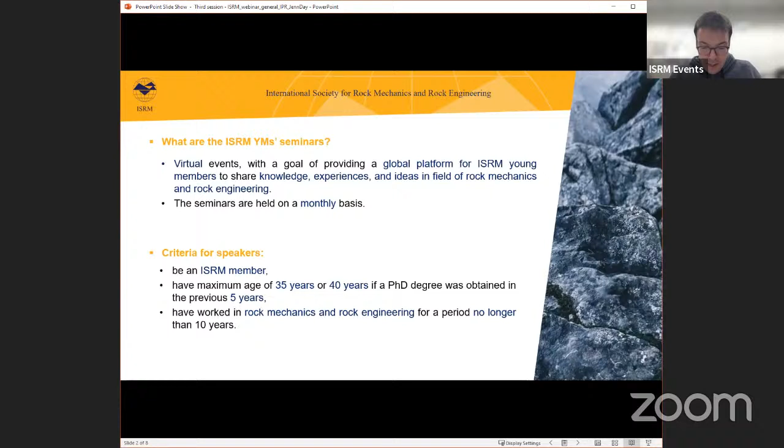The nominations of the speakers can be made by the nominee's national group or by some other person or organization acquainted with the nominee's work, and we also accept self-nominations.

The nominations are to be addressed to the ISRM Young Members Seminar Series Organizing Committee, and on the screen you can see our contact email. This webinar is now being held every month, and we invite you all to keep in touch.

So we will now begin the first seminar of the day, and I'll give some comments on the organization of the seminar. Each presentation will last 20 minutes and will be followed by 10 minutes of questions and answers.

For the smooth running of the seminar, I'll ask you to keep your cameras turned off and microphones muted during the presentation of the speakers. And if you have any questions, please use the chat or the raise hand feature.

Okay, so let's move on with the first speaker. The first speaker is Dr. Jon Justo Urrutia, who, I'll give some lines on the CV, holds a PhD in civil engineering from the University of Cantabria in Spain, and his research field is focused on rock fracture mechanics, in particular on the application of local criteria for the fracture assessment of rocks under different loading and temperature conditions.

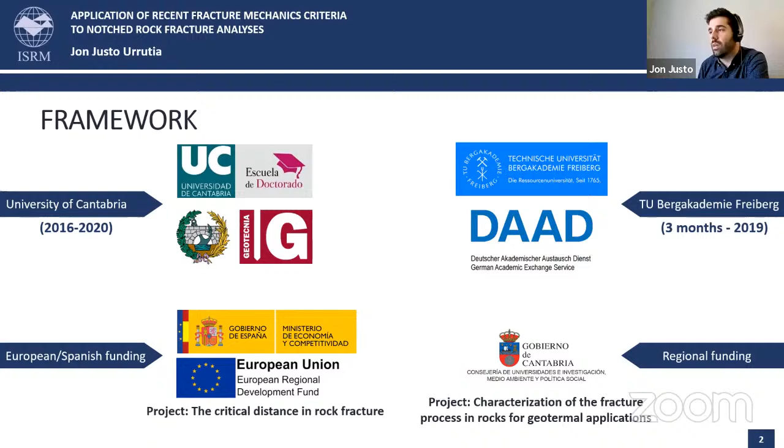To explain the framework of this research, this is part of my PhD thesis entitled Fracture Assessment of Notched Rocks under different loading and temperature conditions and using local criteria, which I performed at the University of Cantabria in collaboration with the Technical University Academy of Freiberg in Germany. Jorge Castro and César Sagaseta were the directors of this research, which was funded by the Ministry of Economy and Competitiveness of the Spanish government, by the European Regional Development Funds, and also by the Regional Fund of the Government of Cantabria.

This is the general outline I'm going to follow during my presentation. First, I will start with a brief introduction explaining some basic concepts of fracture mechanics. Then I will explain the theoretical background of the two studied local fracture criteria: the theory of critical distances and the strain energy density criterion. The former is a local fracture criterion based on the stress field around a certain defect, and the second is an energy-based approach. The application of these two methods requires the characterization of some basic mechanical properties of the studied materials, in this case the rocks. So in the next point, I will describe the analyzed materials and the performed laboratory campaign. Finally, I will finish with the main results and their discussion and some final conclusions.

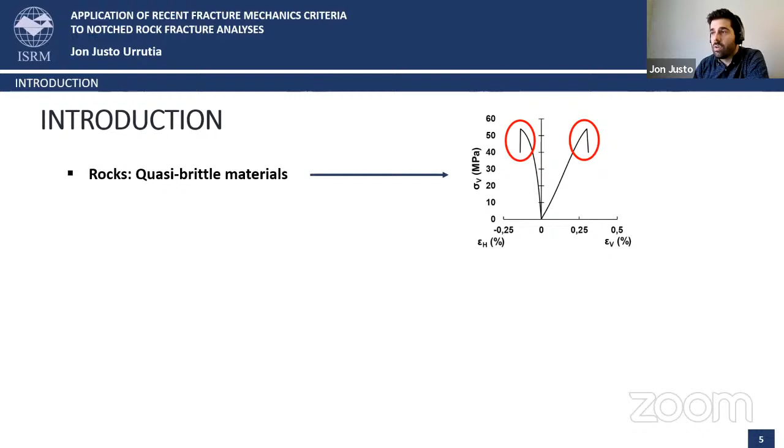Let's move directly into the introduction. One of the main aspects characterizing a rock from a mechanical point of view is its predominantly brittle behavior. Quasi-brittle materials like rocks display very limited non-linear behavior before failure, and therefore crack propagation is unstable and leads to sudden fast fracture. This condition can result in catastrophic failures of rock masses or rock structures, especially under the presence of defects which act as stress concentrators.

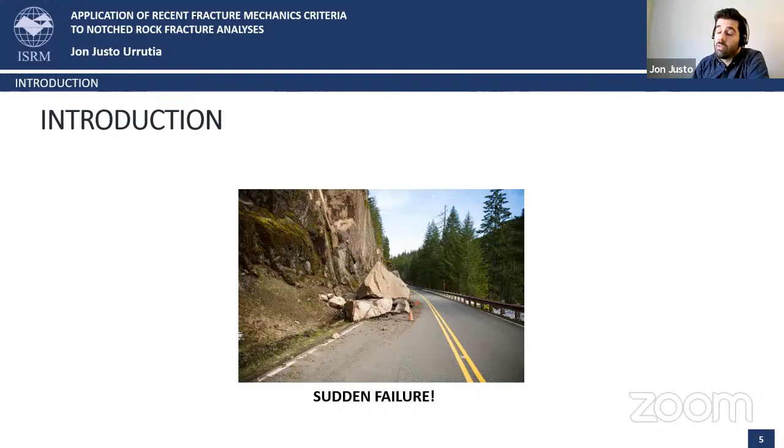For this reason, predicting failure is a major issue of interest in many rock engineering applications, such as civil engineering, mining, or energy engineering. Consequently, there is a general demand for the development and validation of new tools and methodologies that allow the analysis and prediction of rock fracture in a precise and, if possible, simple way.

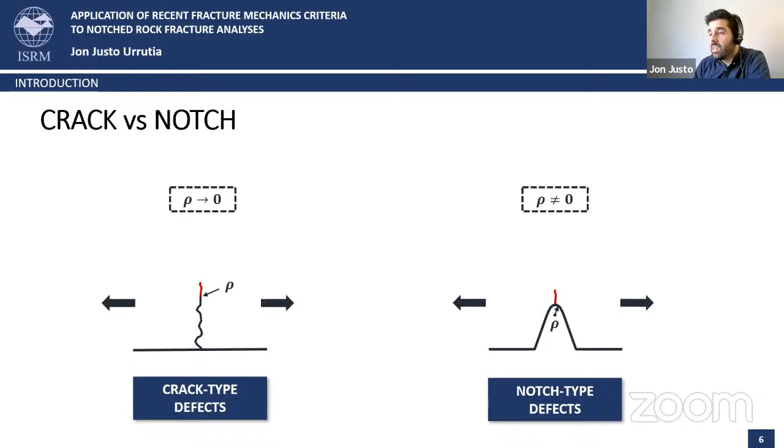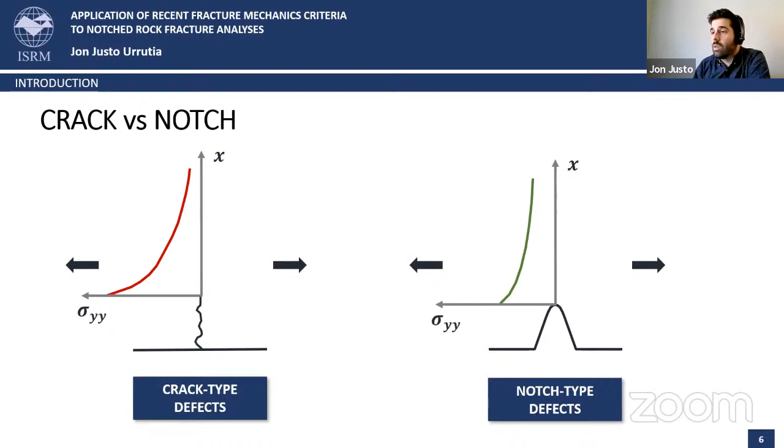While talking about defects, it's important to distinguish between crack-type defects, those with a theoretical null radius as represented on the left of the slide, and notch-type defects, those with a finite radius as represented on the right. Both generate stress concentrations around the defects when subjected to external loading, leading to the initiation and propagation of cracks. If we represent the stress field in the bisector plane of the defects, we can observe that notch-type defects generate less demanding stress fields than crack-type defects.

This is a simplification, but this is what is called the notch effect. So proceeding on the assumption that all defects behave as crack-type defects, as proposed by traditional fracture mechanics, might be very conservative in many practical situations.

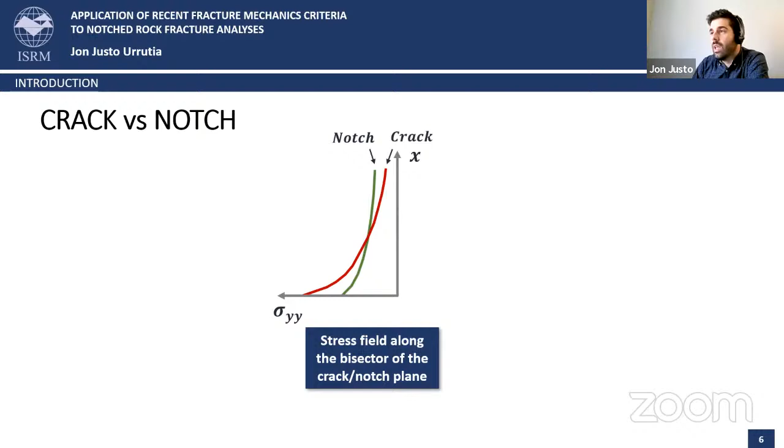Another concept I would like you to keep in mind is the failure modes. Three different failure modes are generally distinguished in fracture mechanics. The first, mode 1, stands for the opening or tensile situation. Mode 2 corresponds to in-plane shear, and mode 3 corresponds to out-of-plane shear. It is widely accepted that crack propagation phenomena in rocks are mainly dominated by tensile or opening loading modes, that is mode 1.

In this presentation, I'm going to focus on mode 1 loading conditions because of time limitations, but in our research we also analyzed mixed mode 1+2 conditions.

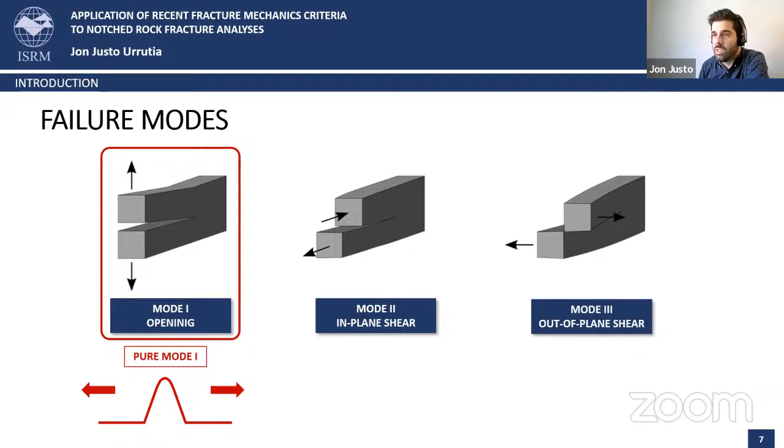The next point is the description of the study methodologies. I think it's not worth going deep into the analytical background of these methods. If you're interested, you can contact me or look at the published articles. But it's more important to explain the basic concepts behind these two methods, so I'll focus on the basics and not include too many formulas.

Let's start with the theory of critical distances. As I said before, it's a stress-based local fracture criterion. Despite its potential and application in many materials, scarce work can be found on the application of this method in the particular field of rock mechanics. The theory of critical distances is a group of methods with common features, such as the use of a material characteristic parameter with length units, called the critical distance, and the use of linear elastic analysis for fracture assessment.

The theory of critical distances can be applied by the point method, the line method, the area method, or the volume method, depending on how the stresses are evaluated.

The first one, the point method, is the simplest form of the theory of critical distances, as it states that fracture occurs when the stress at a certain distance from the notch tip, equal to the critical distance divided by 2, reaches the inherent strength of the material. On the right of the slide, you have the analytical expression for the critical distance, which only depends on the fracture toughness and the inherent strength of the material.

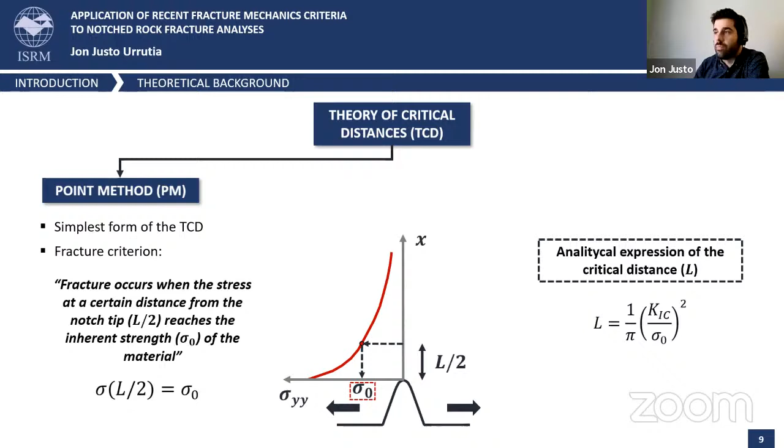In the case of rocks or quasi-brittle materials, the inherent strength can be assumed to be roughly equal to the tensile strength of the material. So to define this parameter, we only need the fracture toughness and the tensile strength of the rock. The second one, the line method,

states that fracture occurs when the average stress over a certain distance from the notch tip, which in this case is 2 times the critical distance, reaches the inherent strength again. So instead of analyzing the stress at a certain distance, we need to analyze the average stress over a certain distance. The expression for the critical distance is the same.

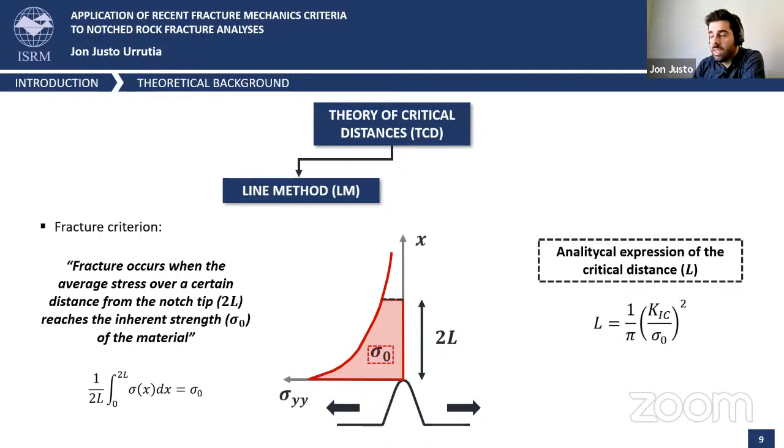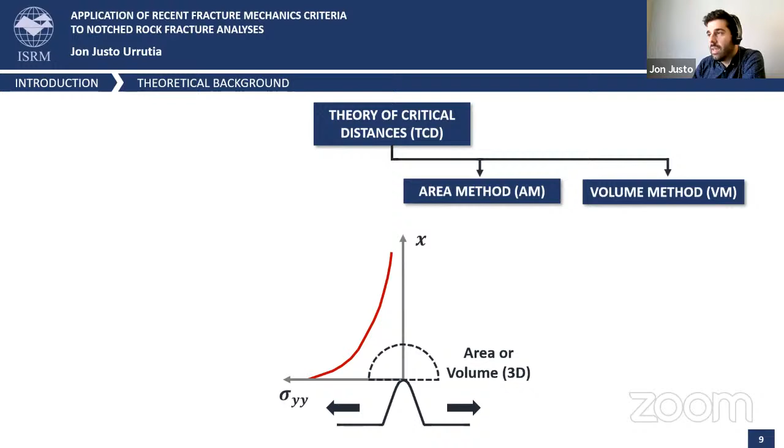Finally, we have the area method and the volume method. Their application is not that easy or straightforward, but basically what they do is analyze the stresses over a certain area in the first case, or over a certain volume in the case of the volume method.

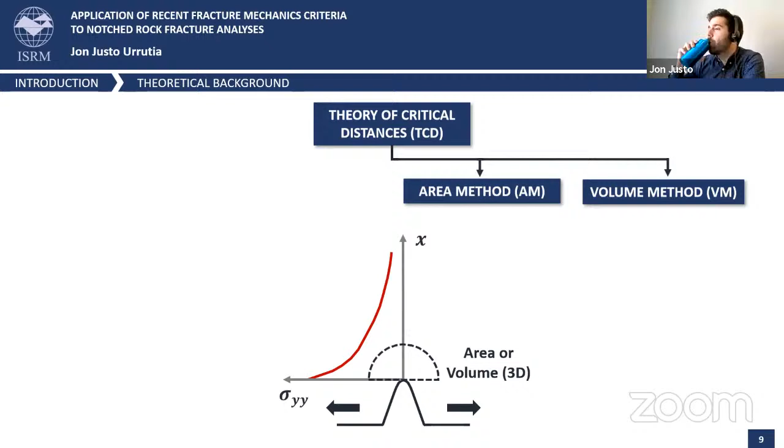Moving now to the strain energy density criterion, this is an energy-based local fracture criterion. This criterion states that fracture occurs when the strain energy density averaged over a certain control volume reaches a critical value. The strain energy density can be defined as the area under the tensile stress-strain curve.

Assuming a perfectly linear behavior of rock, the critical value of the strain energy density can be defined as the area under the triangle defined by the tensile strength and the Young's modulus. In general, rocks are assumed to present roughly linear behavior, but in any case, it should be expected to obtain a lower value of the critical strain energy density than that calculated from the real tensile stress-strain curve.

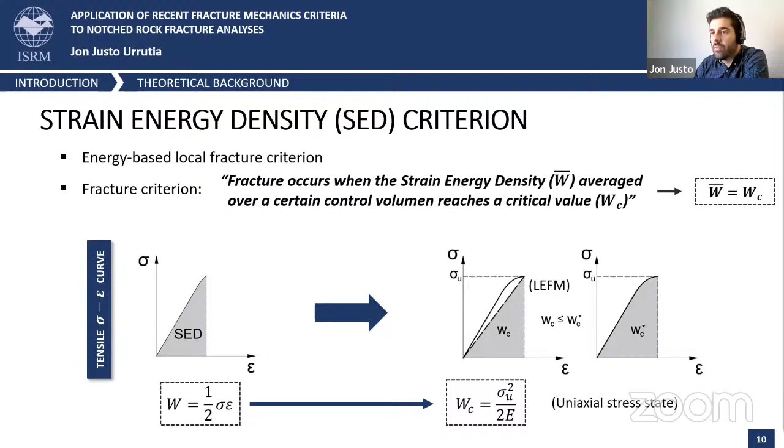In this case, apart from the tensile strength, we also need the deformational parameters of the rock, so we have to define both the Young's modulus and the Poisson ratio. This strain energy density is averaged over a control volume that, in the case of plane strain conditions, becomes a control area, represented on the right of the slide. What we have to do is average the strain energy density in this area, and when this value reaches a critical value, fracture will occur according to this criterion.

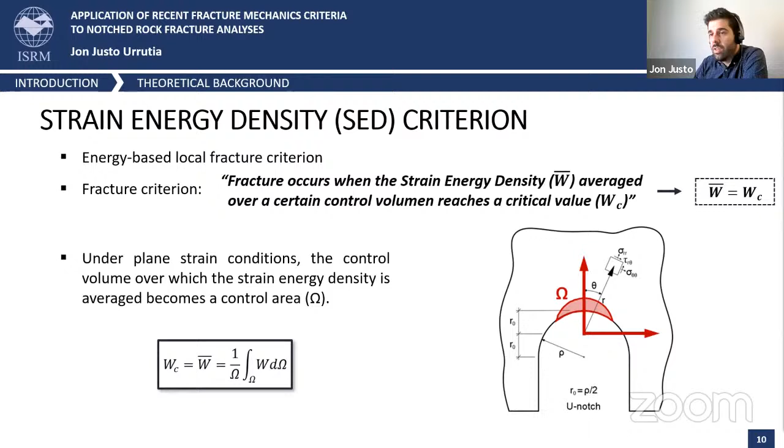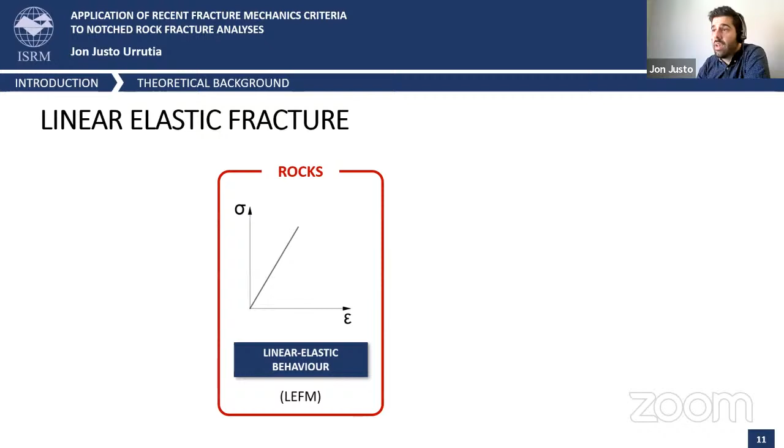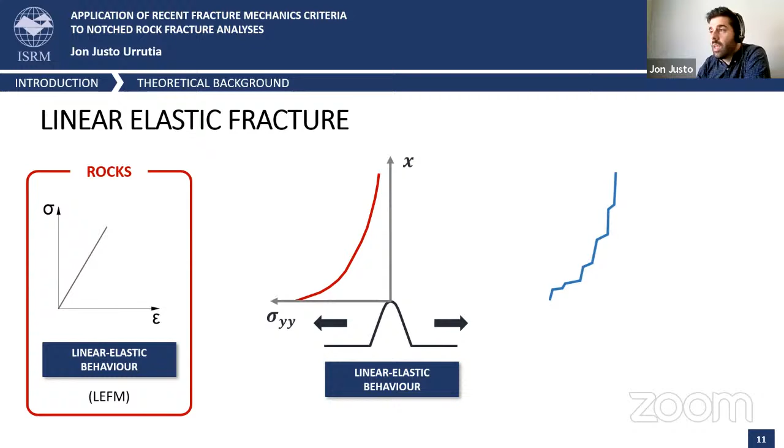In any case, neither the theory of critical distances nor the strain energy density criterion consider the maximum stress just at the notch tip, but they evaluate what is happening in front of the defect tip, not only at the tip. So these conditions somehow absorb the difference between the smooth and the stepped curves.

The application of these two methods, the theory of critical distances and the strain energy density, requires the definition of some mechanical parameters of the analyzed materials. The theory of critical distances requires the definition of the fracture toughness and the tensile strength. And in the case of the strain energy density criterion, we also need the Young modulus and the Poisson ratio. So in this section, I will describe the analyzed rocks and the performed laboratory campaign.

Moving into the analyzed materials, we have studied 4 different types of rocks, namely a Floresta sandstone from Lleida in Spain, a Moleanos limestone from Portugal, the Macael marble from Almeria, also in Spain, and the Carrara marble from Italy.

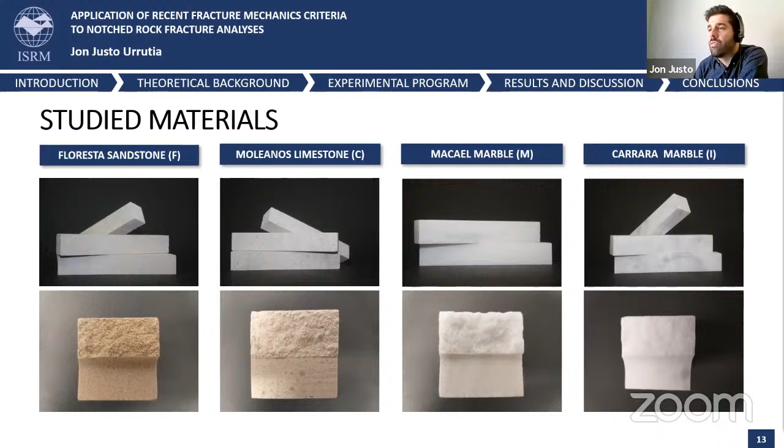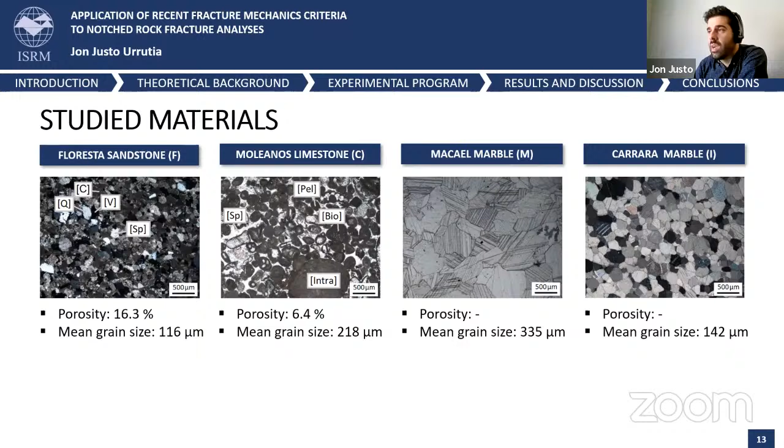Among their properties, I would like to highlight the porosity, which is around 16% in the case of the Floresta sandstone and 6% in the case of the Moleanos limestone. Of course, there is no porosity in the case of the marbles. From a microstructural point of view, the main difference between these two marbles is the grain size, the crystal size, which is relatively larger in the case of the Macael marble.

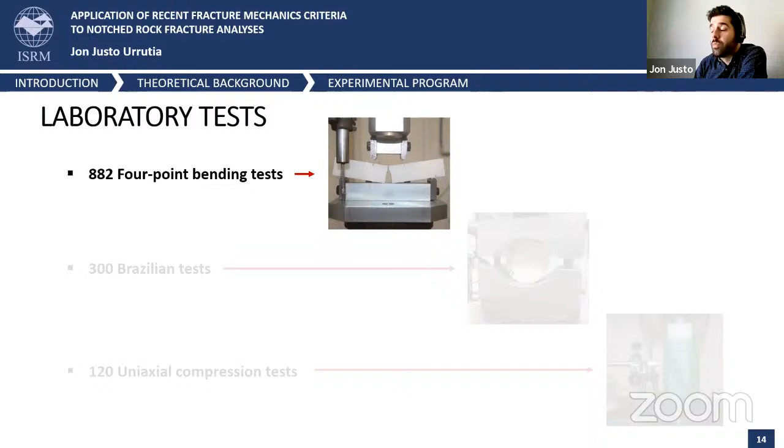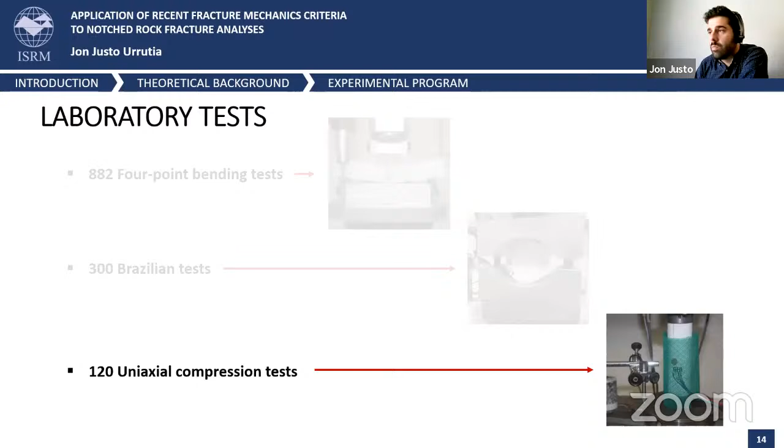For the characterization of these required parameters, almost 900 4-point bending tests have been performed, which provide pure mode 1 loading conditions. 300 Brazilian tests have been performed, and finally 120 uniaxial compression tests with strain measurements have been performed.

So first, the 4-point bending tests have been performed at different temperatures from 23 to 250 Celsius degrees, with a repetitiveness of 6 or 12 tests in some cases for verification purposes.

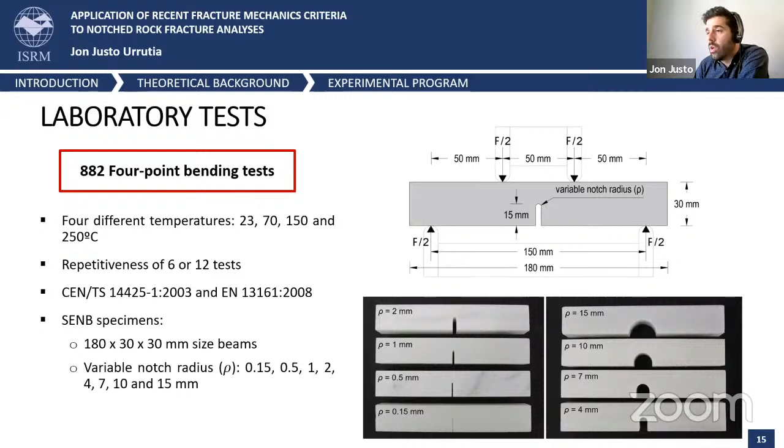There you have some pictures of the used samples, which consist of 180 by 30 by 30 millimeter size single edge notch beam specimens with variable notch radius from 0.15 up to 15 millimeters. Those samples with the smallest notch radius, 0.15 millimeters, were used to calculate the value of the fracture toughness, and the rest of the samples were only used for interpretation according to the theory of critical distances and the strain energy density criterion, to compare the experimentally obtained failure loads with those of the fracture predictions.

So yeah, here you have some pictures of the performed tests.

In order to define the tensile strength of the rocks, 300 Brazilian tests have also been performed at different temperatures, again from 23 to 250 Celsius degrees, using Brazilian disc specimens with 64 millimeter diameter and 32 millimeter thickness.

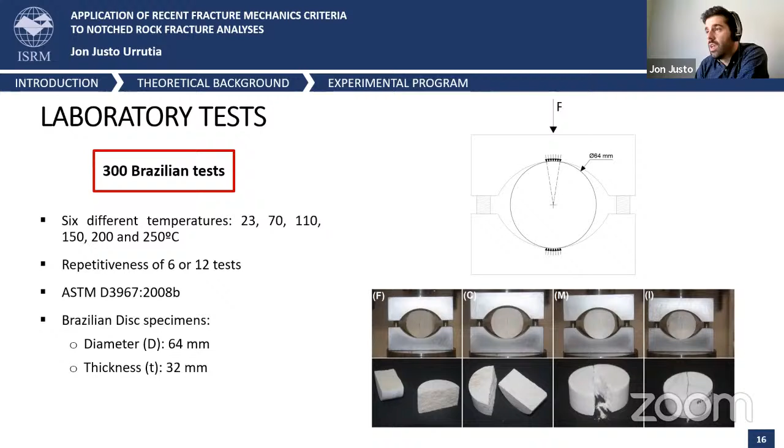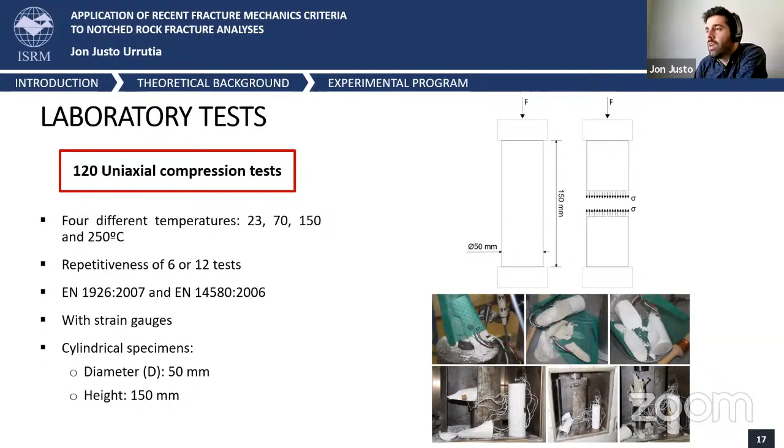And the same for the uniaxial compression test, again performed at different temperatures up to 250 Celsius degrees. In this case, as we needed the deformational parameters, we had to use special strain gauges to measure both the Young modulus and the Poisson ratio at high temperatures, which was not an easy task. Probably the most difficult part of this experimental campaign, because these strain gauges were quite sensitive.

These behaviors are related to two different micromechanisms. In the case of the porous rocks, the Floresta sandstone and the Moleanos limestone, the tensile strength increases for moderate temperatures due to the partial closure of pores or other pre-existing or persisting microcracks. Once a certain critical temperature is reached, thermally induced new microcracks arise, and as a consequence there is a strength reduction. That's why in the case of the non-porous rocks, the marbles, as there is no internal space for the expansion of the crystals, the tensile strength is reduced from the onset of the heating process.

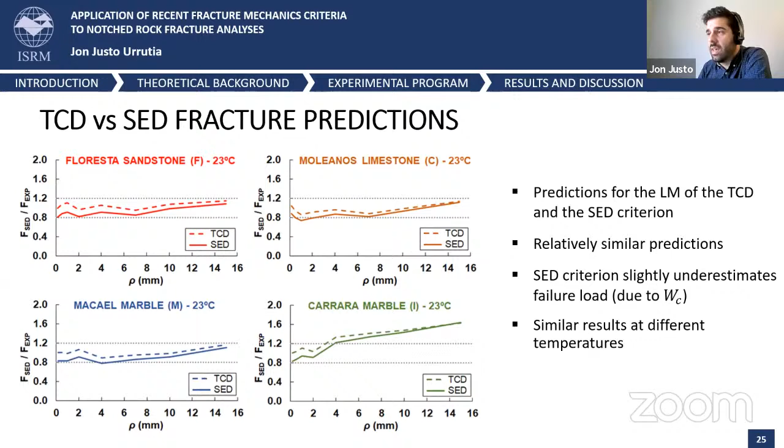If we compare both results, in this case for 23 Celsius degrees, we can see relatively similar results of both methods. The dashed lines correspond to the theory of critical distances, and the solid lines represent the strain energy density criterion fracture predictions. We can observe that the strain energy density criterion tends to slightly underestimate the failure load compared to the theory of critical distances. Another drawback of this method is that it requires the deformational parameters, while the theory of critical distances only requires the fracture toughness and the tensile strength.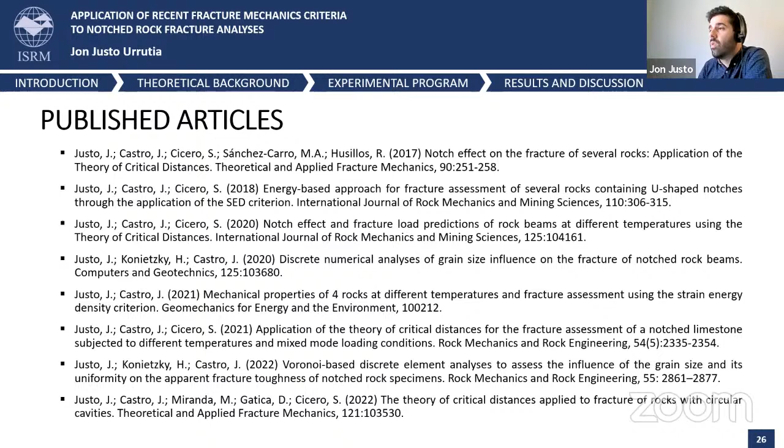To finish, I would like to highlight that the fracture behavior is influenced by thermally induced micromechanisms. We saw that both the tensile strength and the fracture toughness increase up to a certain critical temperature in the case of porous rocks, while they decrease from the onset of the heating process in the case of non-porous rocks. We also saw that the notch effect was evident and significant in the experimental results.

It was observed how the apparent fracture toughness increases with the notch radius from a certain notch size. It's important to highlight also that both the theory of critical distances and the strain energy density criterion offer reasonable and similar fracture load predictions within a range of plus minus 20%. This strip is quite common in fracture mechanics to consider the accuracy of any criterion. So they were valid even at temperatures up to 250 Celsius degrees, as long as linear behavior was observed. They both offer two easy-to-use tools for accurate predictions and evaluations.

In fact, the first one, the theory of critical distances—in this case, once the critical distance is defined, it is straightforward to apply the theory.

It is straightforward to apply this method, and only two parameters are needed: the tensile strength and the fracture toughness. In the case of the strain energy density criterion, additional tests are needed, in particular uniaxial compression tests to define the deformational parameters, both the Young modulus and the Poisson ratio, which are not easy to obtain because you need special strain gauges, special cables that can work at those temperatures, and special adhesives. Also, the welding must be able to work at those conditions.

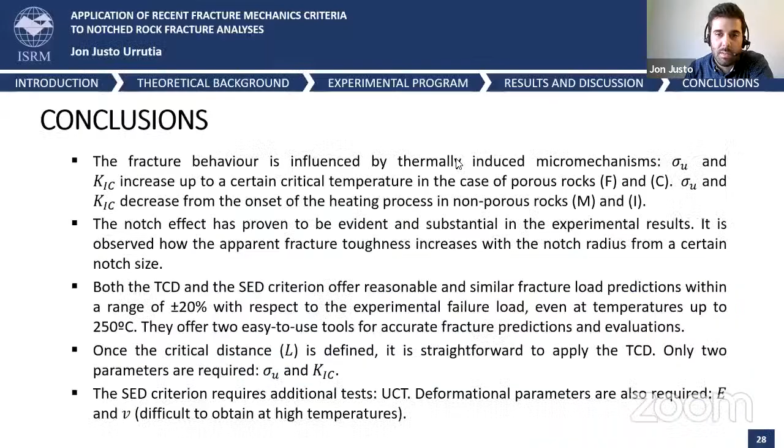But in the case of the marble, no special trend was observed. If we compare these results to those at 250 degrees, the trends were observed to be relatively similar. It's difficult to obtain robust conclusions because of the high scatter we have. The Carrara marble has always given us relatively bad results in all the tests because of its nonlinear behavior, so we couldn't obtain any deep conclusion on this issue. In any case, it's an interesting question, and I will have a look at it because, especially in the marbles which have no internal space for the expansion of the crystals, there must be an effect.

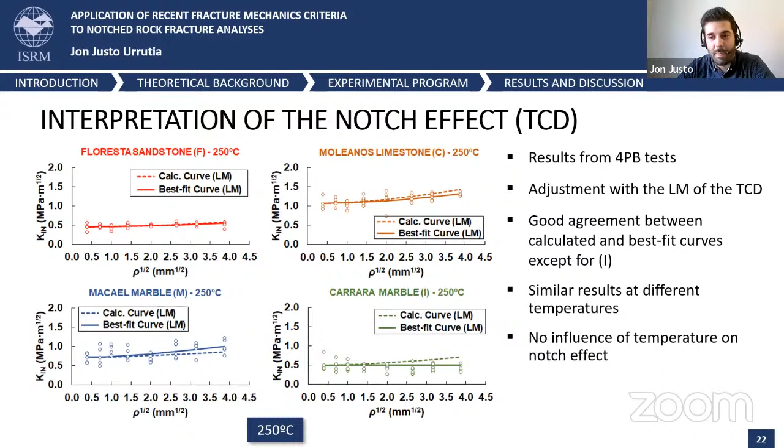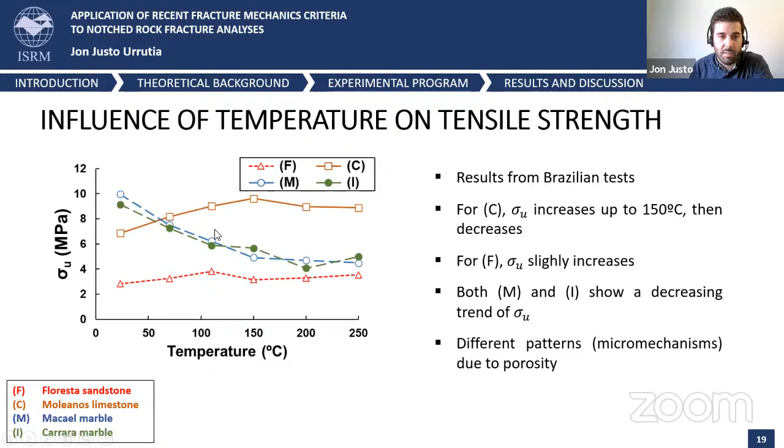The absolute value, here we have the fracture toughness. This is the tensile strength. The fracture toughness in the case of the marbles, the blue line and the green line: from 23 to 70 Celsius degrees it was almost constant, but then we can see a clear reduction of the values.

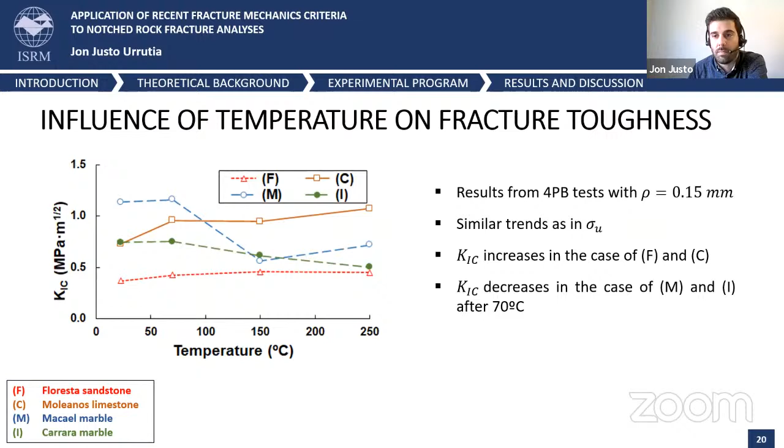Okay, so I just have a little curiosity. Have you tried to compare the results with the tensile strength results obtained in the study? Fracture toughness results compared with tensile strength results?

Yes, well, I don't have the results here because I'm not working on my computer, but yes, we are writing. I think it's now under revision, a technical note on the comparison of the tensile strength and the fracture toughness.

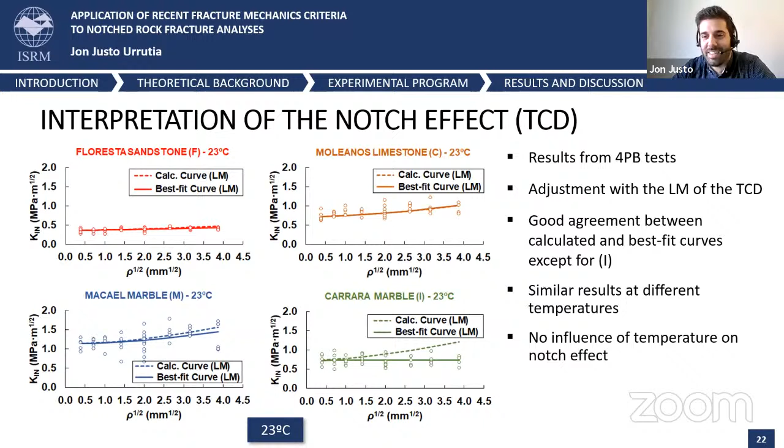Yes, maybe Jorge Castro can tell you something about this, he's connected. Well, just to comment that we saw in the literature that there were some empirical correlations between the fracture toughness and the tensile strength, and there is a ratio that varies between two values.

And we understand that somehow that ratio for us is related to the critical distance or to the area that we average for the strain energy density method for the area that we average the energy. And that is in turn related with the grain size. So the ratio between the direct tensile strength and the fracture toughness is more or less constant, but it somehow depends on the grain size. For rocks with higher grain size, the ratio has some values, and for lower grain sizes, the ratio varies a little bit. There are also, I think in the literature, some numerical simulations that propose some correlations in that sense.

Okay, many thanks. I'll look forward to reading your paper because I think it's a very interesting and recent topic to be studied. So, well, thanks for your answers. And now I switch the role to Jennifer Day, who will continue with the seminar. Thank you.

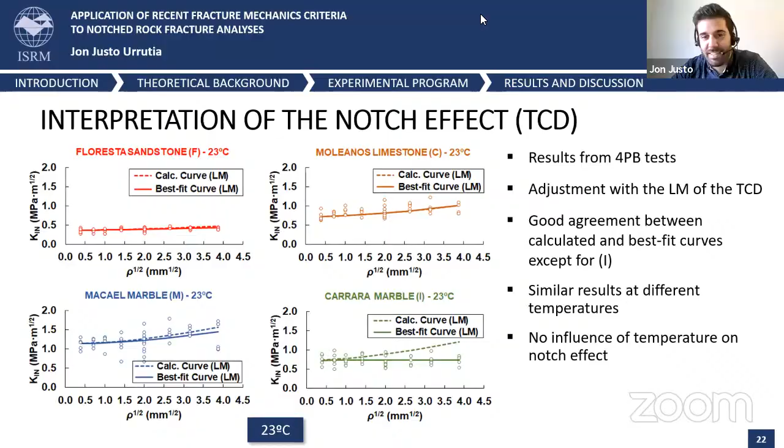Jonathan Aubertin, who holds a mining engineering degree from McGill University in Montreal, Canada. From 2012 to 2021, he held various roles within mining company Windsor Salt and the US parent company Morton Salt, working as a mine engineer, production engineer, and general supervisor. Jonathan completed a PhD in geological engineering in 2020 while working at the Weeks Island mine in southern Louisiana in the United States. In 2021, Jonathan transitioned to an academic role as an assistant professor at École de Technologie Supérieure in Montreal, Canada. His research work focuses on rock blastability, rock mass characterization, and time dependency in rock engineering.

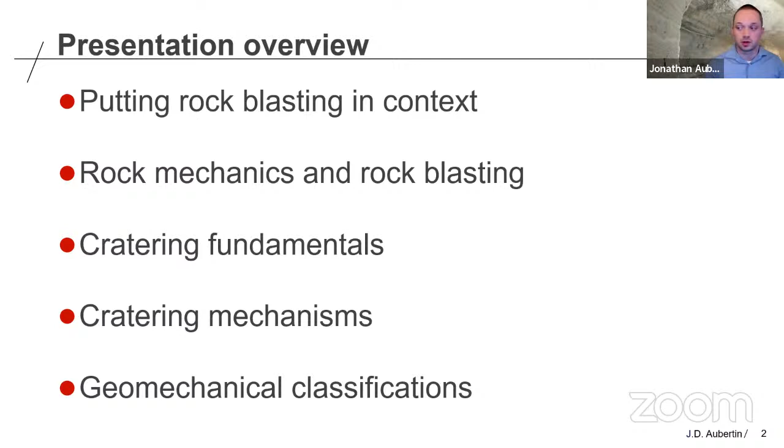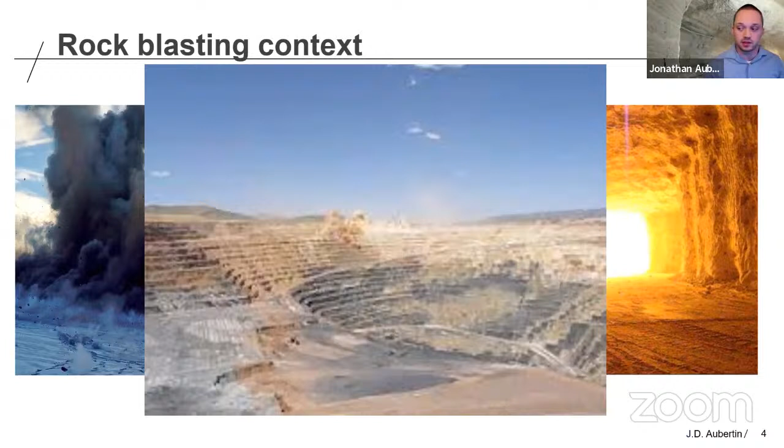I think we're all very familiar with rock blasting. It is a common process in the construction industry and the mining industry. It's very prevalent in surface mining and underground as well. We see it a lot for developing underground tunneling operations, developing large-scale infrastructures underground. And it is something that you see a lot as well to define rock slopes around railway infrastructures, roadways. It is something very common in many different fields. Ultimately, it's important to realize that rock blasting remains today the most cost-effective means of loosening and extracting rock. And so it's something that we do a lot.

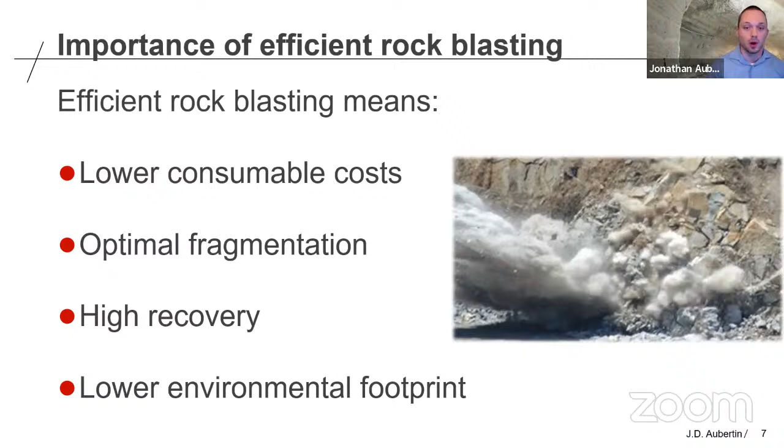There's some very good reasons to improve how we understand how we do rock blasting. Efficient rock blasting leads to obviously lower consumable costs. If you've got efficient rock blasting, you just cost less in terms of consumables. You can also optimize your fragmentation, which is very important in anything pertaining to mineral processing, especially for ore treatments. You can get a much better recovery or control in terms of the geometry of what you're blasting. Very importantly also, and that's something that is a growing field of interest with respect to rock blasting, a more efficient rock blasting process leads to a much lower environmental footprint, both in terms of energy consumption downstream, but also just in terms of gases generated by the blast and runoff associated with it.

There's some fundamental notions that I think need to be discussed when we think about rock blasting, especially when we try to relate this to rock engineering and how both correlate to one another.

The process of blasting involves a solid, a liquid, or a slurry that is transformed by a detonation chemical reaction from its original state into a gas in a very rapid fashion. This imparts a shock wave to the rock surface near the blast hole. Very close to this blast hole, you have a very high pressure being imparted, basically crushing and pulverizing the material.

Further along, you have a transitional zone that is not quite pulverized, which has a bunch of radial fractures but is still highly damaged. Then you have a zone more important for practical application, the fractured zone, where a series of radial fractures emanate from the blast hole section. This fragmentation zone is not particularly large. You're not destroying the rock mass, and it's not the primary means of fracturing for extraction, but it's very important for what takes place downstream.

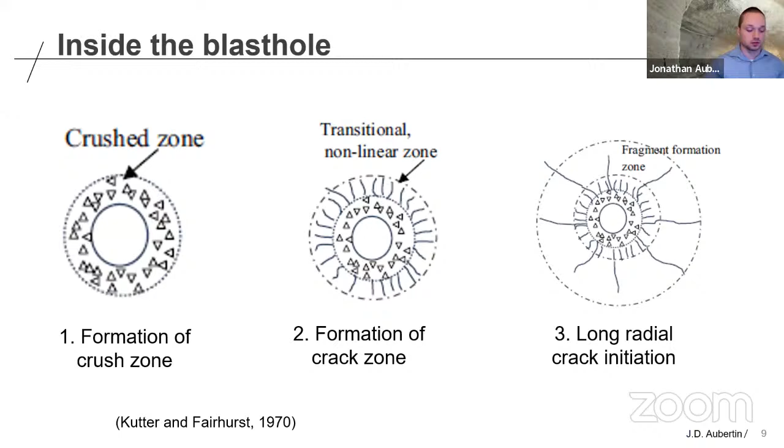Past this damage zone, you have the propagation of an elastic wave. You've damaged the rock mass near the blast hole and generated a series of radial fractures. Past this, you have elastic transmission and propagation of pressure waves. The primary pressure wave we usually talk about is the P wave, a compressive wave, which is usually the driving shock wave of interest for blasting.

You have all the other types of seismic waves we're used to, especially shear waves whenever you interact with heterogeneous components, fractures, or local inconsistencies. But the P wave is typically the driving factor of interest.

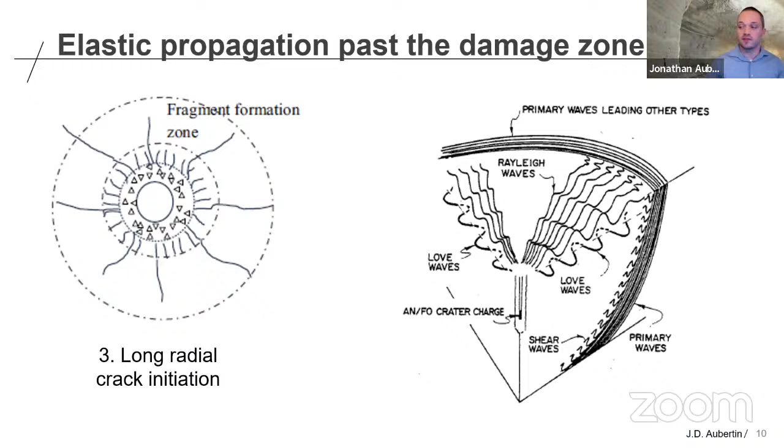Now that we acknowledge what's going on around the blast hole and how this shock wave is transferred elastically to the rock mass, it's important to question how we're actually fracturing this. It's not because we're pulverizing along the blast hole that we've extracted several thousand tons of rock. So there are three distinct cratering mechanisms responsible for actual rock fragmentation and extraction for practical application considerations.

The first and foremost, most detailed in literature, is radial fracture propagation. This P wave, this compressive wave emanating from the blast zone, travels radially away from the blast zone and is reflected in tension by any given free surface. Typically in blasting, you have this big bench face in a mine, or in underground work it would be cut in the middle of the face. You have this free surface that reflects the wave in tension.

This wave in tension comes back towards the blast hole and interacts with the radial fractures talked about previously. The tensile wave basically opens up and props up those fractures, allowing them to reach all the way to the free face. This behavior is very critical to the cratering process, because the geometry of radial fractures and the way they expand reaching the free surface yields a generally almost prismatic crater shape. This prismatic, triangular cross-section of the crater is very fundamental to all modern notions of blast design, and all our guidelines and rules of thumb relate to some extent to that dimensioning of the crater.

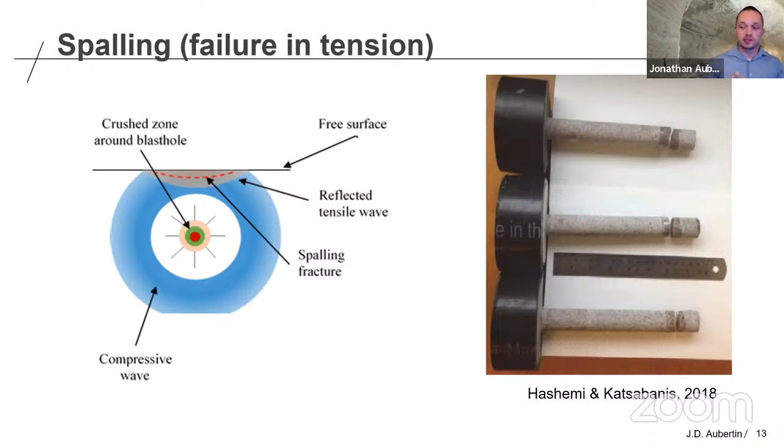We know it's there, but it's not quite prevalent in large-scale production operation. The third cratering mechanism, which is quite important, is the concept of wave interaction.

When you have this wave propagating compression being reflected in tension at the face, you basically have this tension wave being reflected, interacting with the tail end of the still incoming compressive wave of the original emission. So you have this compression wave acting as a very high compressive stress component. We'll call it sigma 1.

And if you have any kind of incidence with the reflected tensile wave that is not head on, you have angle of incidence between sigma 1, very high and compressed, and sigma 3, almost perpendicular, coming backwards and basically negative. So now you have a situation: sigma 1 very high, sigma 3 negative. You have a very high deviatoric stress, localized.

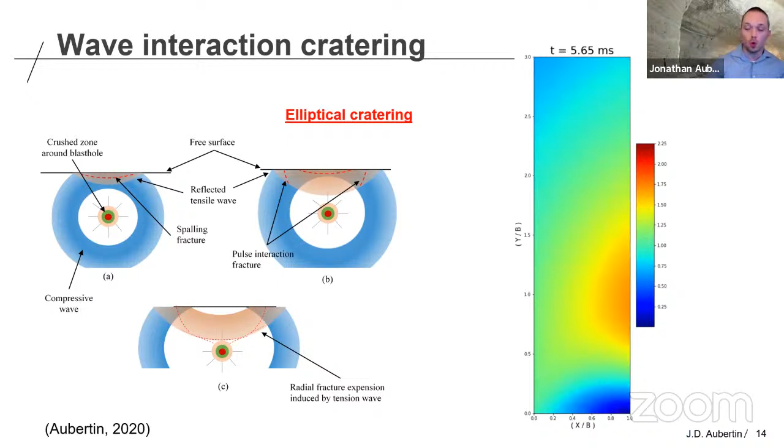As we can see on the figure on the right, which is a simple analytical representation of this situation, what you get if you map the high point of this deviatoric stress is an elliptical profile, which is very characteristic of this cratering behavior.

So now that we've defined the cratering mechanisms behind rock blasting, the next question becomes: which ones are more prevalent? When is one cratering mechanism taking place and why? And how is geomechanics taking place? The way we've been doing our research to quantify and define this has been through the use of single hole blast testing.

We're basically shooting an individual blast hole, measuring the resulting crater, varying the distance between the blast hole and the free surface, which we refer to as the burden. We vary this dimension and we try to quantify the resulting relationship.

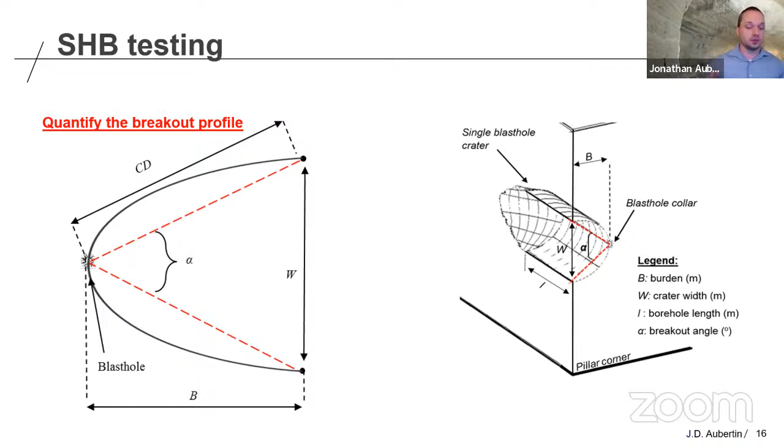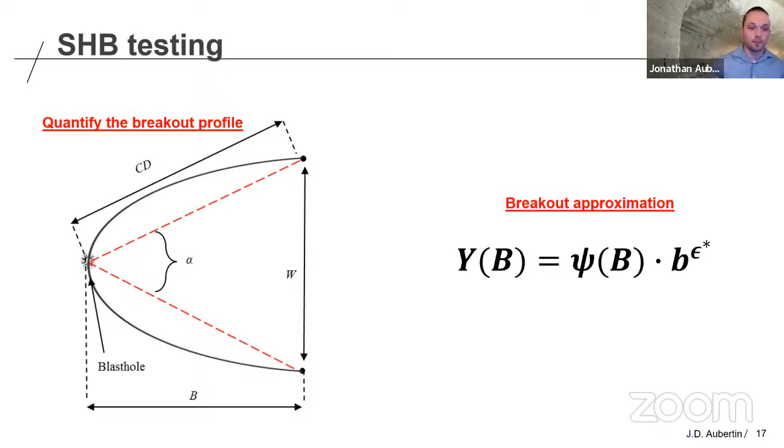You get two parameters, namely psi and epsilon star, that define how your rock mass is behaving in terms of blasting. One of the interesting and useful pieces of this formulation is that the exponent there, epsilon star, actually defines the cratering mechanism taking place.

If you have the exponent lower than 1, you have concave cratering behavior taking place. If you're above 1, you have some convex cratering, which may not be intuitive, but it's something that's been observed and we'll talk about later. Then if your exponent is equal to unity, you have prismatic cratering, which is associated with this traditional, more accepted, acknowledged cratering behavior, representative of typical rules of thumb and guidelines.

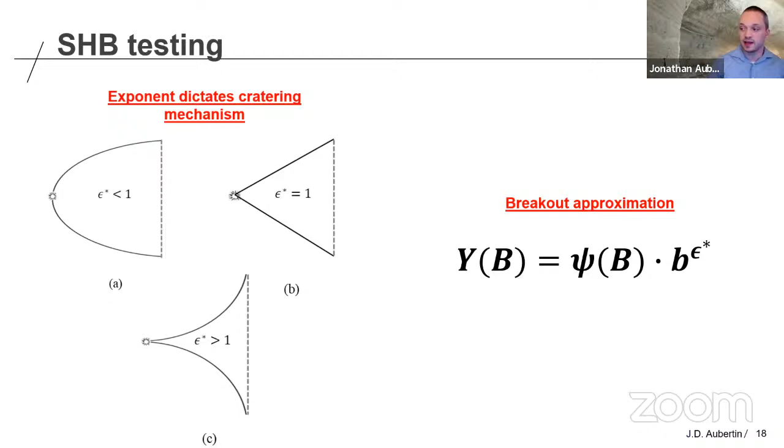To further investigate this and to use this approach of single hole blast testing, we did a bunch of different tests in various geologies. We did testing in various hard rocks and also on concrete blocks, and that various testing has been published in different places. But what we've noticed by representing the result through this proposed formulation is something very consistent.

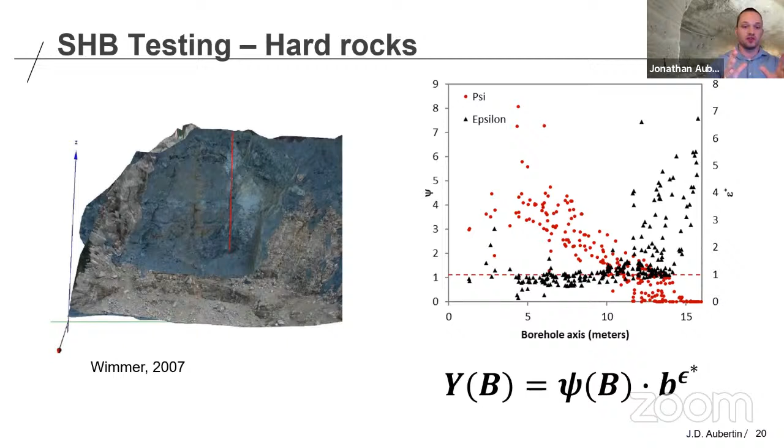The advantage of having modern topographical mapping tools like LiDAR is that you're no longer trying to best fit one value to a given crater. You can measure the crater profile at different intervals along the blast hole axis.

So what we see from those given hard rock testing is, from a general standpoint, hard rock gives you a constant exponent value regardless of the evolving burden, up to a certain point. That exponent usually revolves around 1, which is what we typically expect from hard rock blasting. We expect that prismatic cratering.

Then at some point, you have a tipping point going up where past this, you start having a higher value of the exponent with a higher burden value. We'll get back to this in an instant, but to sum this up, for the most part, in hard rock, the exponent is constant and close to unity.

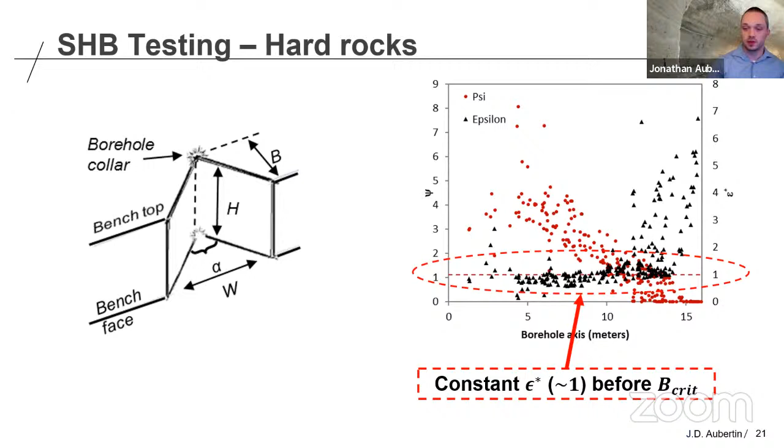By contrast, we did a lot of work, and actually a lot of my work was originally in salt and to some extent in potash. We've seen this consistent recurring elliptical cratering profile in all those underground salt mines. You can see this in tabular deposits, in heterogeneous salt deposits, and pure domal salt. We consistently get this concave, elliptical cratering profile, which we associate with the exponent being lower than 1.

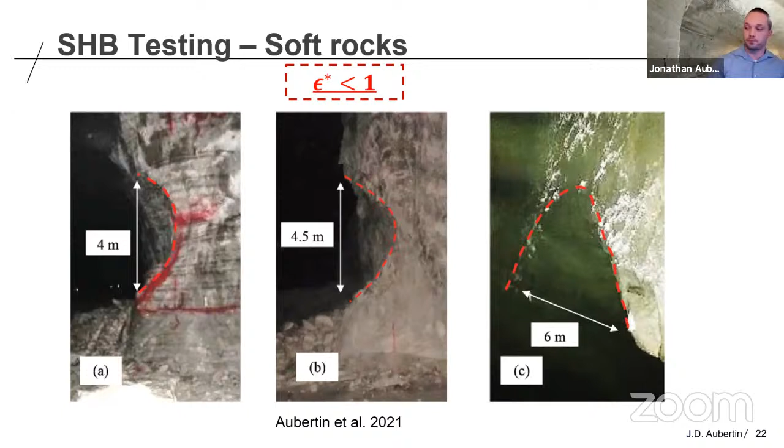So why are we seeing these differences? We understand there are existing cratering mechanisms. We clearly see a differentiation between what we expect as soft rock, salt, potash, and similar lower strength materials, versus those hard rock materials that are prismatic.

So we first investigated elliptical cratering, wave interaction. Why are we not seeing this? Well, what we found from numerical modeling using LS-DYNA software, which is a generally accepted software for these kinds of simulation, is that elastically speaking, the interaction process, the wave interaction does happen.

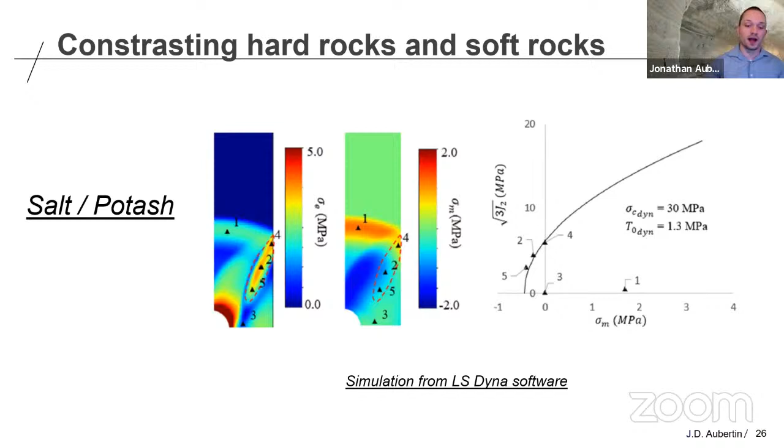By contrast, soft rock, salt, and potash, which have been documented, if you simulate the same blasting conditions, same type of explosive diameter, etc., now you're getting a situation where you have deviatoric stresses that are at or above the mechanical strength of material. And there's some circumstantial advantageous situations, such as a different type of explosives used in those materials. But bottom line, you get a situation in those types of rock where it is possible to have wave interaction, whereas in hard rock, it's not possible.

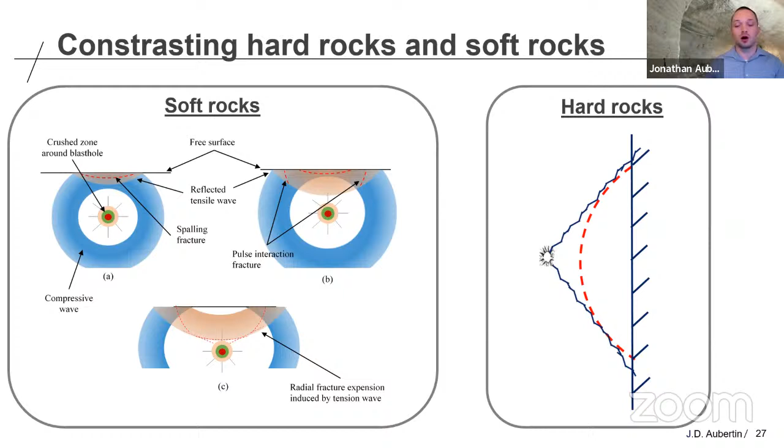Hence, from a general standpoint, in soft rock, you have wave interaction cratering yielding elliptical cratering. In the hard rock, you have the generally acknowledged radial fracture cratering.

We've talked about convex cratering very briefly early on. I think it's important to get back to this because there's always going to be other types of non-conventional rock breakup types. There was a very interesting study performed by Dr. Wimmer on critical burden experiments. He basically did single hole blast testing the way we did, but pitched the blast hole very steep in the rock to increase progressively the burden and really evaluate the evolution and the impact of burden.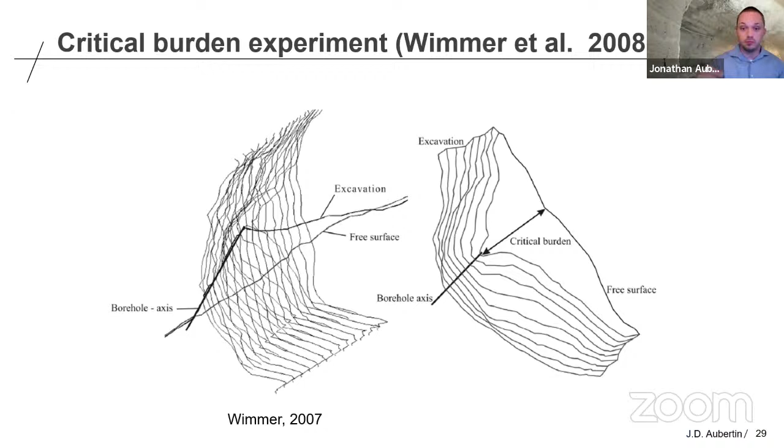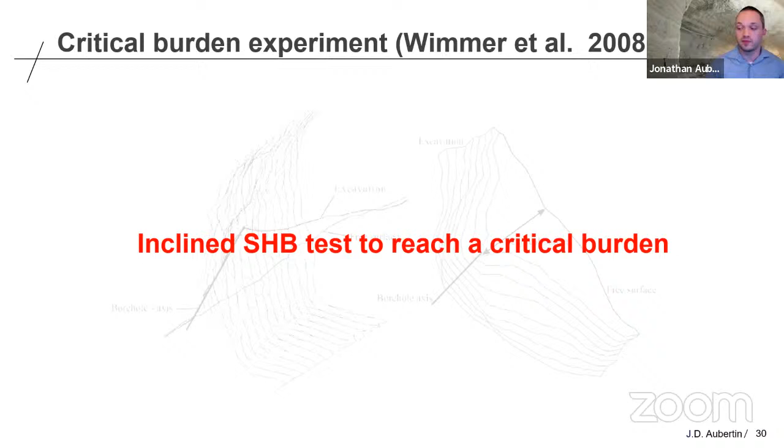And as you can see, as you get closer to this critical burden, as you get close to a value where the rock just won't blow up, won't crater up, you get the seemingly convex behavior, which we kind of didn't necessarily expect, but has been seen for critical burden, and we can quantify with the formulation previously proposed.

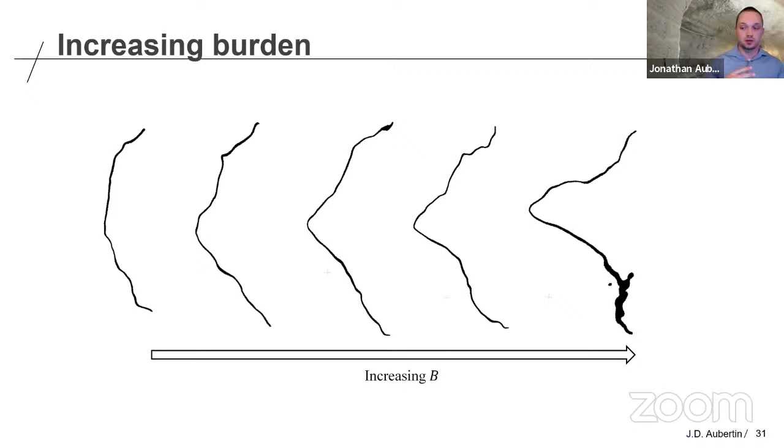Dr. Wimmer was kind enough to share his data set. A lot of this was topographically mapped after the blasting situation, and he was kind enough to share these data sets we were able to review and analyze. And what we saw was a mix of both what we've seen before and what was talked about in terms of critical burden.

What we see at the small burden range, we see this characteristic almost circular shape, which we talked about. It makes sense. You're close, you have a small burden, you're close to the face. You expect something somehow circular because you're in the spalling range, which you get at small burden.

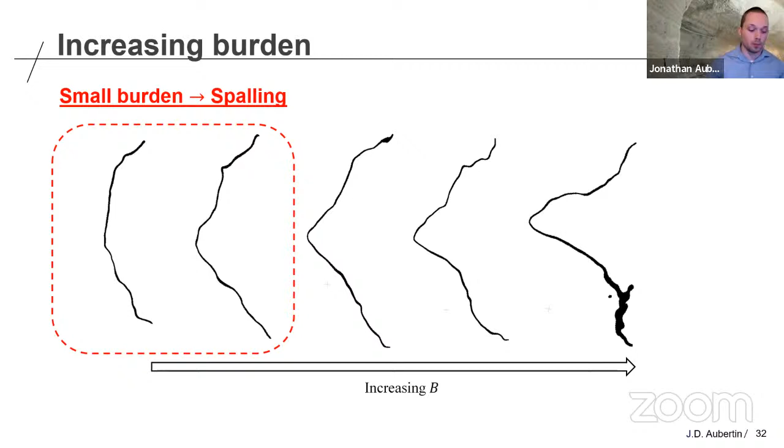Here at the center, which is just one cross section along the crater, but it's actually the typical range in practical operations and production, you get the seemingly prismatic cratering, which we expect from hard rock blasting. What's interesting is when you get closer to the critical burden, you get this seemingly convex shape, especially the crater on the right, which we really see something going on here, opening up in a convex shape.

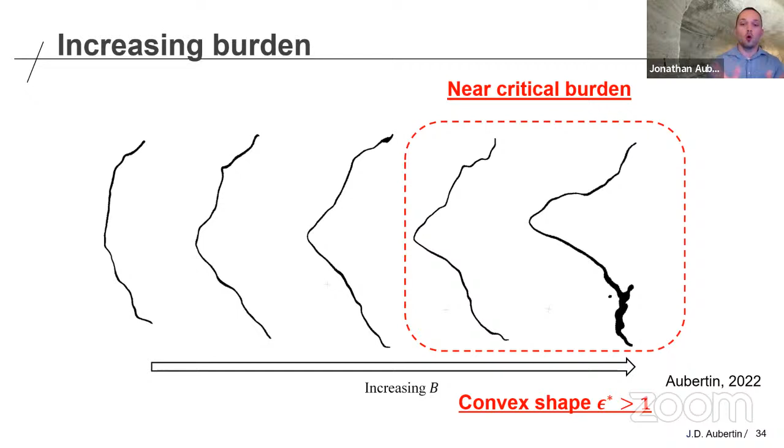Now, what's very interesting to note, going back and reflecting on the mechanisms taking place, is you have a combination of two different sets of cratering mechanisms. You still have radial fractures propagating, interacting with the tensile zone, but you also have this localized shallow spalling taking place. Now, if you don't have something dominant, such as a radial fracture precluding everything else, you have this opportunity to see the interaction of both.

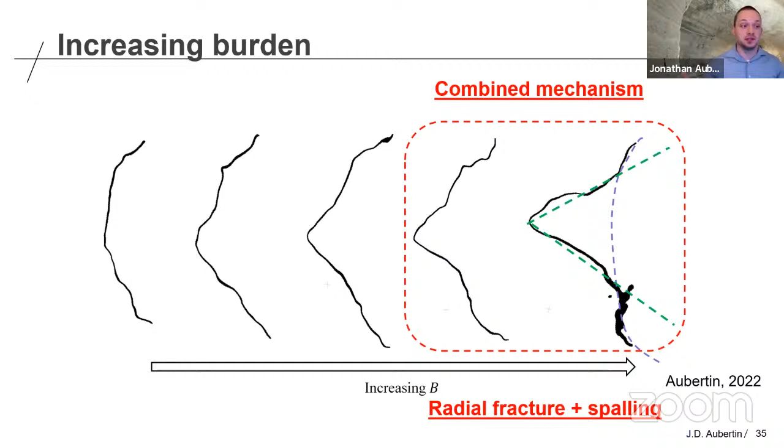And so while we describe it as convex cratering, which makes it very convenient for quantifying and modeling purposes, what we actually see is a combination of two different cratering mechanisms, namely radial fracturing combined with spalling, that yields this larger than one exponent and convex crater.

So in concluding remarks, there are, as I described, three coexisting cratering mechanisms: spalling, wave interaction, and the traditionally well-acknowledged radial fracture, which is prevalent in hard rock. Wave interaction, elliptical cratering, arises more specifically with soft rock. You need to have a special geology to allow you to get to such type of cratering. Then you have radial fracture, which, as I mentioned, is prevalent in hard rock.

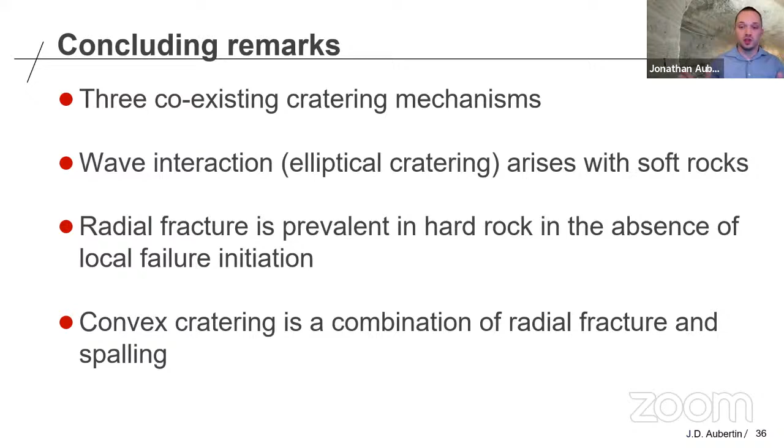It's the basis of rock blasting designs as we know it in modern textbooks. The reason you don't see wave interaction cratering is because there's no local failure initiation, despite having this spike in deviatoric stresses. Then you have convex cratering, which is a combination of radial fracture and spalling, which yields two different combinations of crater shapes.

In practice, it's important to acknowledge what we're doing this for. We're trying to quantify the shape of the crater with respect to the burden. This is a good example of how we use this, how it's important to calibrate your single hole blast testing site specific.

At this baseline, we were blasting things at a mine site, and we basically took the time with a can of paint and a high reach to paint every single crater, every blast hole, to show what the profile of the crater would be based on the burden dimension. This is only achievable if you actually do this, your calibration with single hole blast testing.

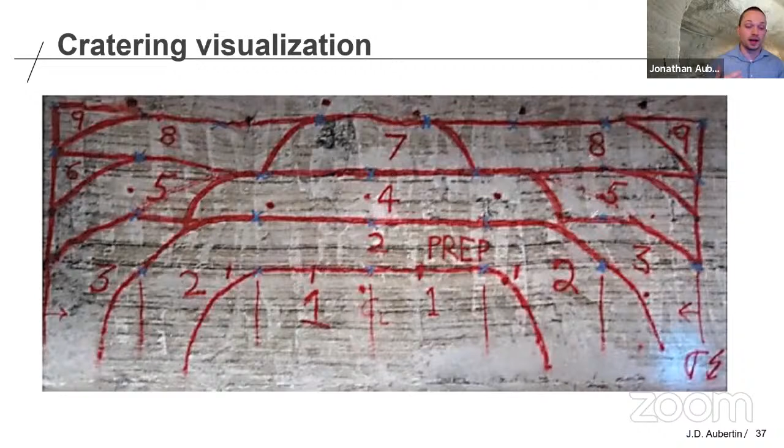Now, this is a bit extensive. You don't need to paint this every time, but this was a very useful tool and process to showcase to the workers, the workforce, the collaborators, that this is why you're doing this. This is why you would move a blast hole to a certain place, because you can pull more out of it and you actually get that site-specific calibration.

Before I conclude, I need to acknowledge a lot of people who supported me as a young professor: the Discovery Grant, industrial partners including my former employer Morton Salt, ETS my university École de technologie supérieure, and the construction engineering department, and my previous outfit, my previous brothers in arms, Queen's Geomechanics Lab, where a lot of this research was originally done.

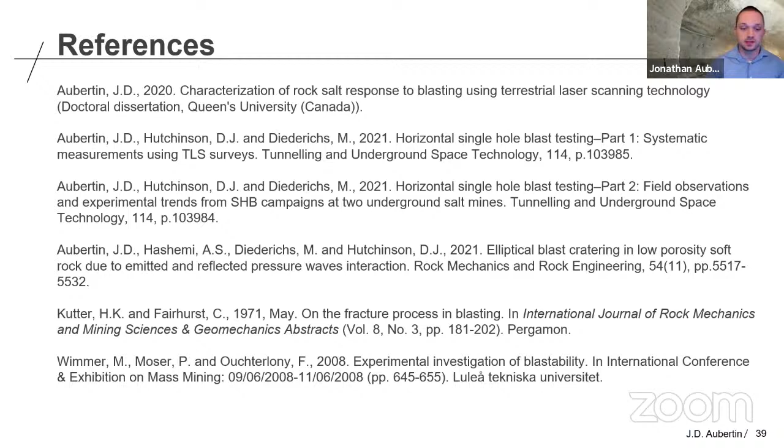Here's a series of references, and I would be glad to hear from you guys for some questions. Thank you very much.

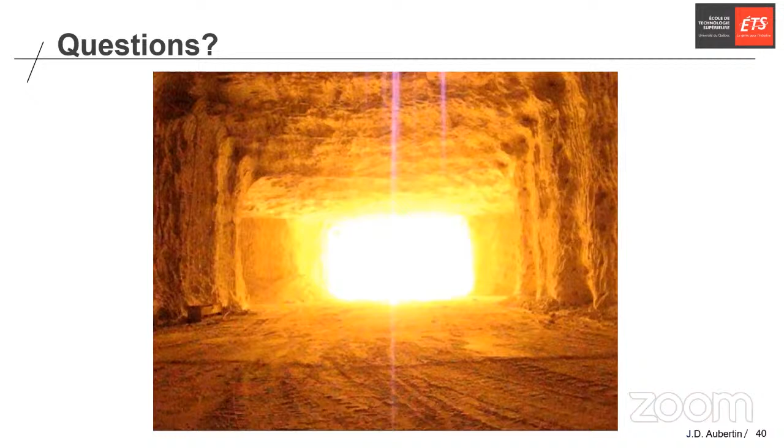Okay, thank you. Well, for radial fracture, if I understand correctly, for spalling, the ability or lack thereof for spalling to take place is related primarily to the tensile strength of the material. And that's why you use this feature and phenomenon to do special testing designed to test where the breakage takes place along the rod. That's how you would define in laboratory settings the tensile strength, or how you can use this.

For radial fracturing, a lot of this has to do with the first component I talked about in the presentation, which is the damage zone itself around the blast hole. The range at which those radial fractures initiate and propagate, their initial depth and range, influences a lot how much potential there is for interaction with the reflected tensile wave, because the damping of that wave is exponential, not just linear. The further away you're coming back, you're losing a lot of that energy rapidly. So if your radial fracture propagates far enough, you have a better chance of interacting with this.

Now, the distance at which the radial fracture propagates is related to some extent to the rock mass strength. It can also be related to the structures, because the structure can help or actually be a nuisance, since those fractures can be in the way and act as a blocker. It also relates a lot to the explosives you're using, which is something we've studied extensively and shown to be very important at least in salt mines. If you're using an explosive with too much energy, you pulverize the rock near the blast hole, but you have very little energy left to propagate in the rock mass, and you don't get that many radial fractures emanating. So you've got to be mindful.